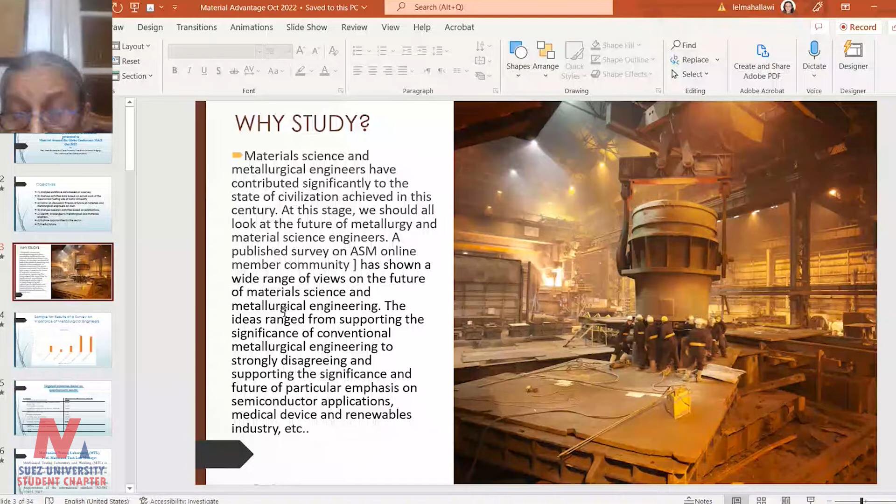The first thing I did was look back at the analysis we prepared during our preparation for the quality file, which is the accreditation file for the university. One of the things we had to do is look across where our graduates go.

Where do they work? I found that our graduates are distributed among major sectors represented by industry, which is steel, foundry, aluminium, metal forming, industry in general, then petroleum.

And in petroleum, of course, they do not work on rigs and drilling and producing petroleum, but they work on all the materials related to the extraction of oil, the transfer and everything, the pipelines, and this is where our engineers would be working.

Construction sites would include civil engineers as well as materials engineers working on the steel structures used there for validation, for testing, for assuring that the materials used comply with the standards.

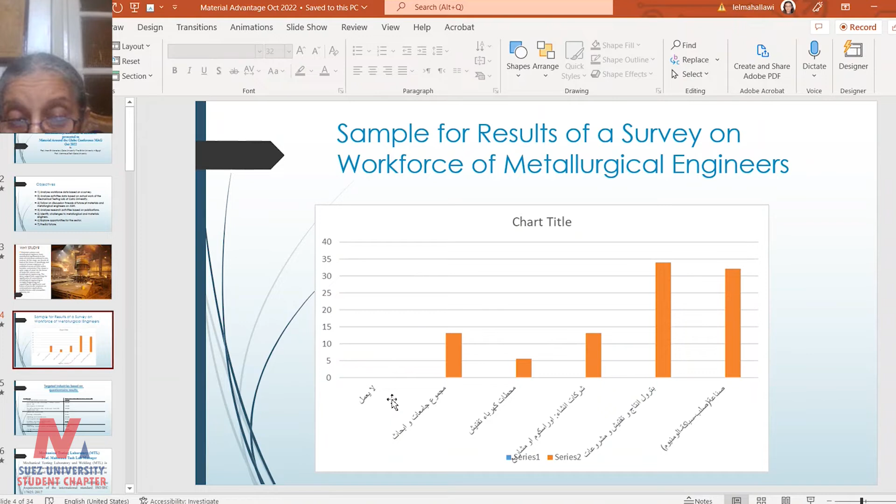Power stations, the same applies, where there is a lot of materials in power stations, and a significant number work in research and education. Actually, the sample I collected, which is more than 150 students, only one of them reported that he or she doesn't work, and it didn't even show because it was one of about 165 students, so it doesn't show on this bar chart.

Then I started to make a prediction of the number of materials engineers needed annually in those different sectors. Of course, we all suffer from the lack of numbers and statistics available on websites which should do this for predicting the future.

Before determining the number of students accepted for each engineering area, there should be a study and a national consideration of how many engineers we need, and accordingly the newcomers or students joining the first year should be accepted in view of these numbers.

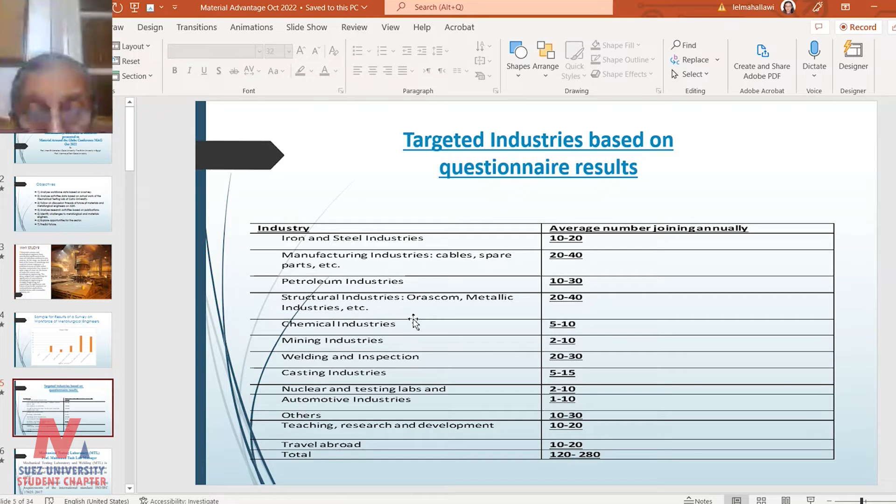It would be very helpful for deciding the number of students in the annual intake of any materials or metallurgical engineering department. The next thing I looked at was the work coming for testing, characterization, failure analysis, study and consultation cases, the work which comes to the mechanical testing laboratory at Cairo University, which is one of the greatest labs doing a lot of services for industry.

It's called Mechanical Testing Lab because originally, when it started, we were focusing on the mechanical properties of materials, but now the work has been extended to include other properties needed in industry, such as corrosion and others. So I looked at the number of customers visiting this lab and the amount of work needed.

By this lab actually is a great amount, which requires that the staff working there stay till 6 o'clock every day, 5 days a week.

And this is just a sample of the customers coming. All these customers are coming for the sake of material validation. We can see tractors, Orascom, engineering industries, melting companies, foundries, machinery parts and spare parts. The customers are from a very wide background.

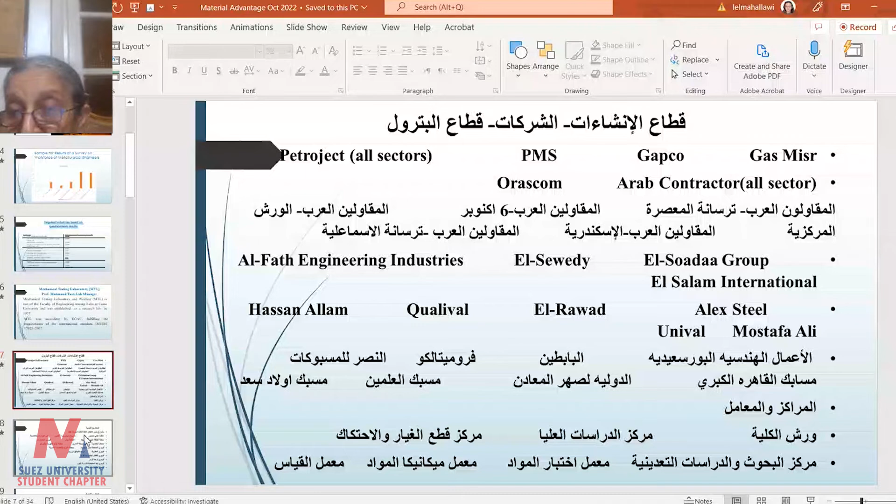You can see here, sorry, it's in Arabic, but this is how the data is reported, so it's just easy for me to take it as it is.

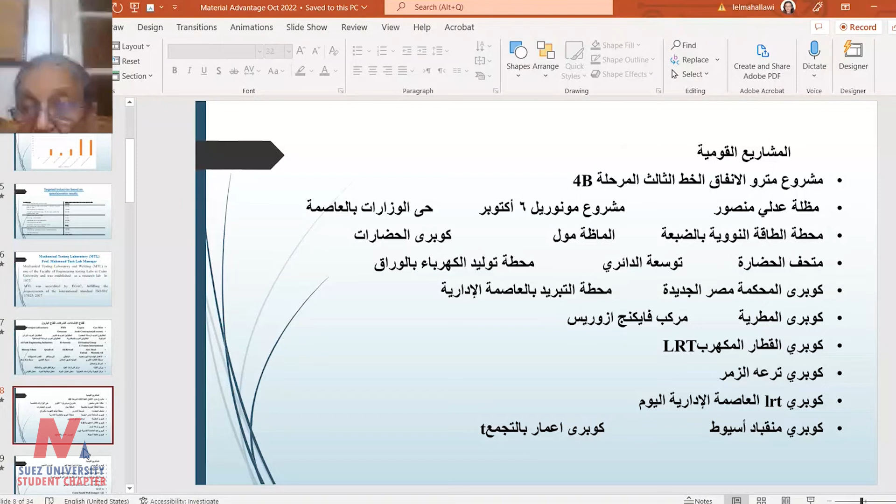Even the new electric train line, the new capital area construction, power stations - all these are customers, meaning all these sectors need materials engineers, because usually the engineers coming with the work or case to be studied are materials engineers. And here we have more projects like water projects, installation of pipes, petroleum, and construction and bridge building.

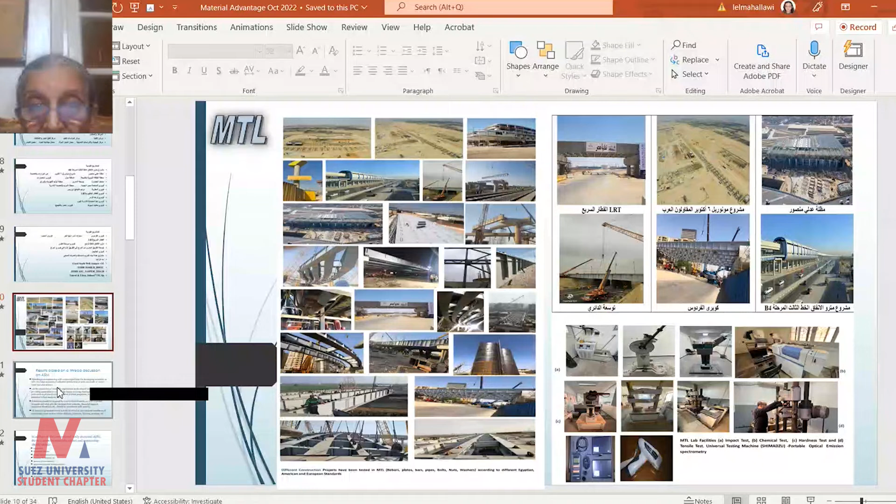And these are just images for all the construction sites that have been visited by members of our staff during the work. Then these two pieces of information, with the main conclusions that I have collected from the thread of discussion on the ASM site.

For example, I have concluded based on ideas and views presented by the contributors that metallurgical engineering will remain significant for developing countries, as still very large amounts of industrial production of parts are made of metals, such as steel and aluminium. Yet the expansion of materials engineering in developed countries leads to providing generalists, because many departments or programs there have changed to materials engineering and they do not focus.

Of course you cannot study everything in 3 or 4 years, so if you focus on materials engineering, you have to understand many things about materials, ceramics and polymers, and that's going to be at the expense of being specialized very much in metallurgy.

So the countries - and this is not on my mouth, but this is on the mouth of the contributors - the expansion of materials engineering in developed countries has led to providing generalists in most topics, and now they have a shortage in specialists in areas such as physical metallurgy end product properties, welding, casting, failure analysis, etc.

So I think that education should be inspired by local industrial needs as well as global demands, and what gets attention from industry - financial support, equipment donations, etc. - should be considered with priority.

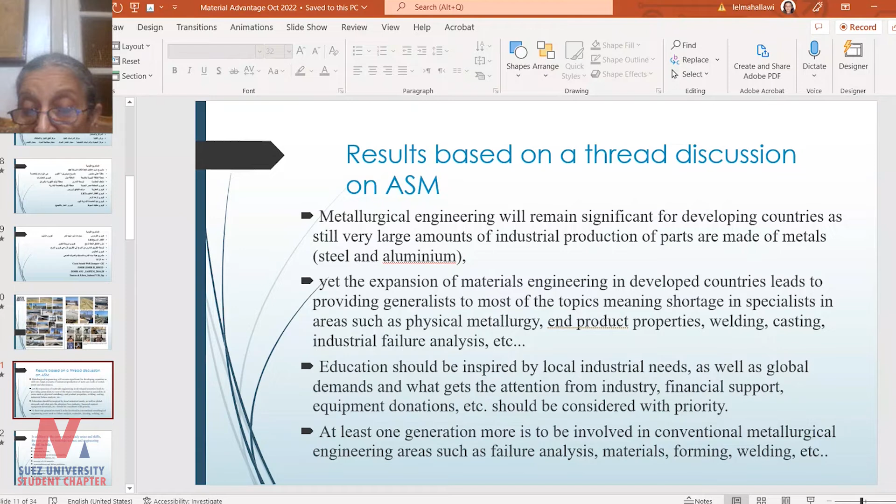And based on that - not only my opinion, but many contributors from India and other countries just like us - at least one generation more is to be involved in conventional materials, conventional metallurgical engineering areas such as failure analysis, materials forming, welding, etc.

In addition to the conventional study areas in metallurgy, we should not forget or ignore our graduates. The future engineers should be involved in other topics such as renewable energy, biomedical devices, energy harvesting and storage materials.

Materials for batteries, recovery of old materials, superconductors and failure prediction of superconductors, developing new materials that include quantum physics concepts, thinking about components for new computers and the AI that's going to be the future technology, developing new processes and materials, and the demands of high technology applications for hybrid and electric vehicles.

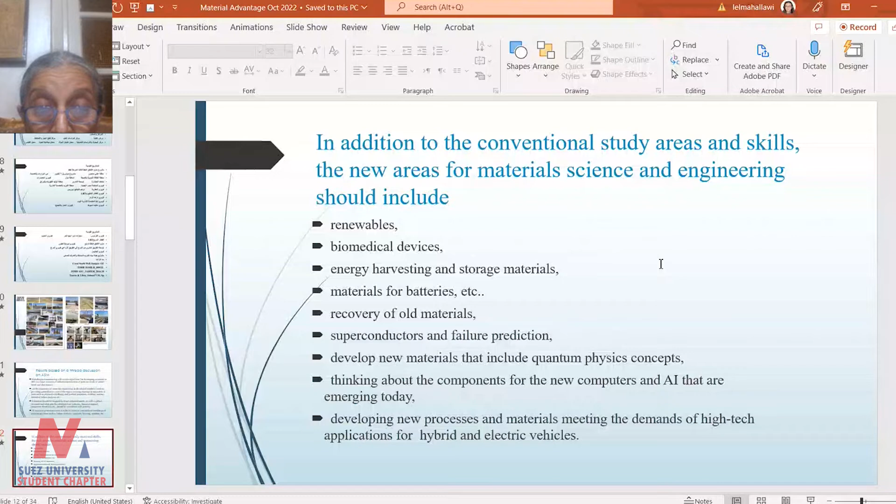These are just a number of topics that we see every day in the news, and our graduates should be prepared, because at least a percentage of them will surely find job opportunities in such areas. So these also should be included in the education for preparing new materials engineers.

Then I looked at Scopus, which reports the trends for research - what are the researchers doing? Dr. Karim Badr has politely referred to universities doing work for industry. Actually, this maybe will be 50% or less of the work at university, because researchers all over the world are equally focusing on

something new which is going to happen, which looks crazy for someone actually working on a certain area, but that's going to happen one day. And without people thinking about what's going to happen in 10 or 20 years, we would not have been at the position where we are now.

So based on these three sources for finding information, what should be done? We should operationalize higher education for innovation, industrialization, inclusion, and sustainable economic development in Africa. And now I have to go to Africa - it's not only Egypt, Egypt has to be a focal point in Africa. So I continue the remaining part of my presentation referring to Africa rather than Egypt.

And actually this would be referring to the region. But Africa needs Egypt more than the other part, because the other part of the MENA region, the Middle East, is developing, but Africa needs Egypt.

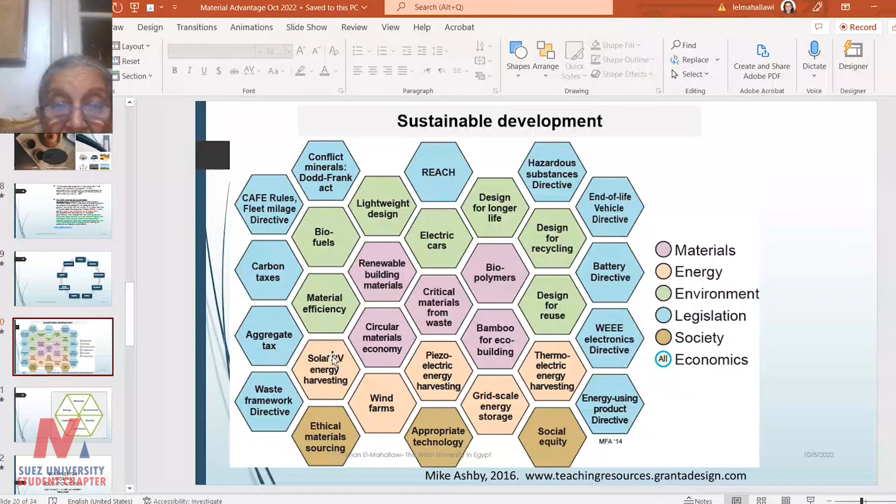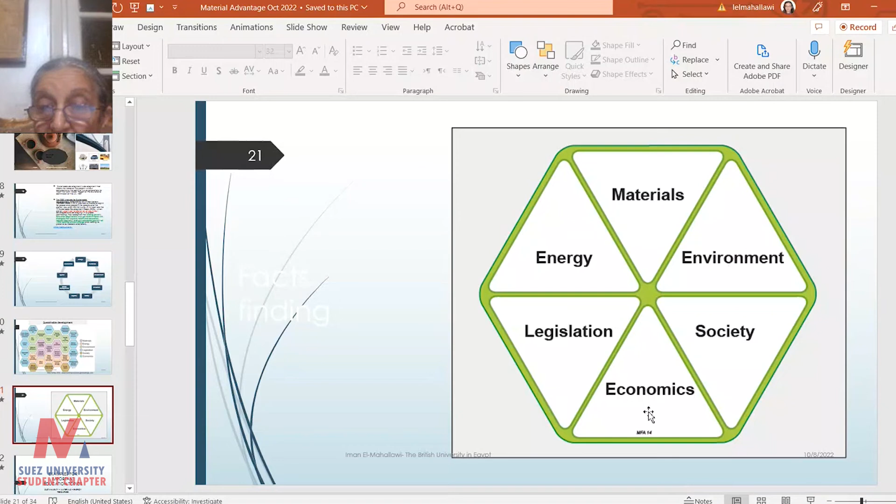And this is a range of ideas that may help you in your thinking. Again, we put it together - materials cannot stand on its own. It has to go in line with energy, environment, society, economics, and legislations. So I have come up at the end of this presentation with some examples for important education topics that may help my colleagues in integrating sustainability actions into their courses and whatever they teach.

The first thing I would like to refer to before going to the topics - let's not forget yesterday, back in the 60s. I remember these days, I was a kid, but I remember. It was metallurgy, number one. All the programs served or offered in the great universities all around the world were called metallurgical engineering. There were some emerging programs on polymers and ceramics.

During 50 years, metallurgical engineering expanded or integrated to be called material science and metallurgical engineering. And many, including the school where I learned metallurgy - I took my PhD at Leeds University, and it was called School of Metallurgy or Metallurgical Engineering Department - now it's called the Material Science and Energy Department. So what is the difference? Material science would include, in addition to topics about metals and metallurgy, mechanics, structures, design, and economics.

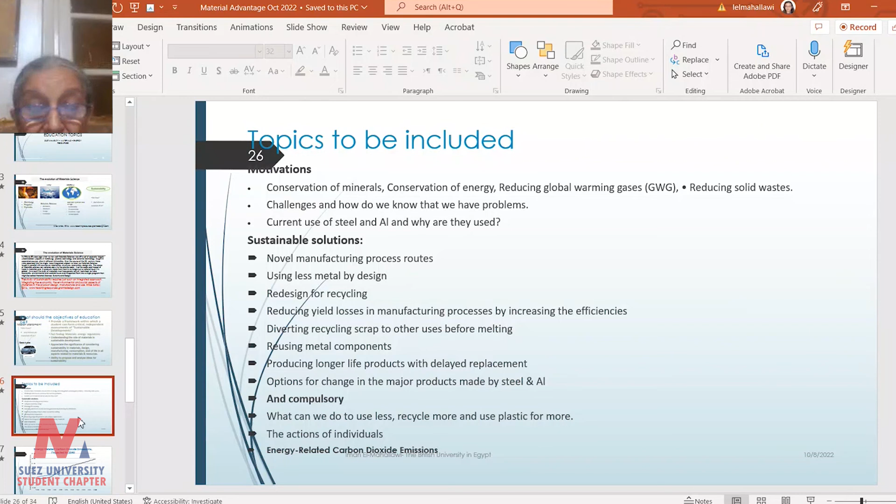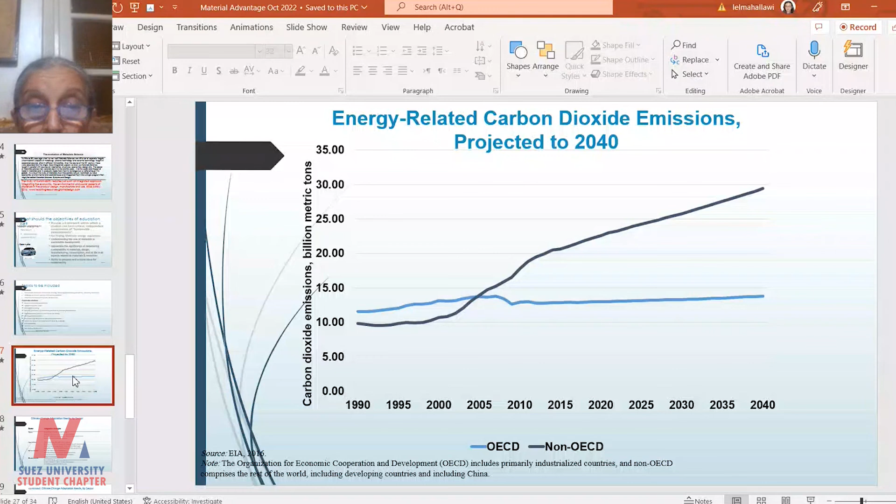Dr. Badr has referred to global warming and carbon dioxide emissions. Actually, this is true, it's not imagination. A lot of statistics are available on the website showing the increase in dioxide emissions and the increase in the temperature of the globe. What are the adaptation strategies? Actually, now the whole world—we are going to have COP27 in Egypt very soon, in less than a month.

World leaders are going to come and gather and collect ideas and talk about what legislations have they made in their countries in order to adapt to climatic change. We cannot reverse it, we cannot combat it, but we have to adapt to it. This adaptation would be covered in all major aspects of life: water, agriculture, infrastructure, human health.

There should be adaptation, and materials would come everywhere here. Everywhere you use material in conveying water to people, to cities, to rural areas. You use material for making the solar pumps, for making the pipes, for making the agricultural engineering equipment. You use material. Infrastructures, you have just seen that steel structures or new structures which are going to be proposed, even if not made of steels, are made of materials.

Human health, a lot of research is ongoing now. When you attend a material engineering conference, half the session would be focused on biomedical materials. Transport, of course, we need not talk about storage, energy storage and batteries. This is all materials' job.

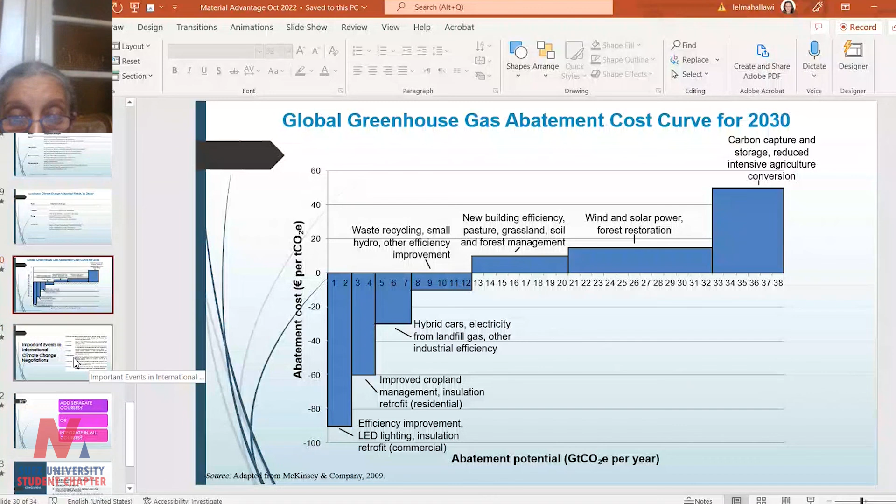And the main COPs that have happened were COP6 in 2001, COP15 in 2009, COP17 in Durban, COP21 in Paris, and actually we can add 2021, which was in Glasgow, because this is a mark where the ideas of meeting the global challenges have changed. Instead of combating and fighting, now it's adapting. We have to do adaptation. We have to use what we have and consider what's there for the future.

So the conclusions of this presentation show the role of climatic changes and sustainability: finding ways to recycle and or dispose of materials, revision of standard specifications. Actually, this is a very important topic. I expect that standard specifications that we use should be revised because many of them are based on materials made from raw material. Now materials are going to be made from recycled materials, and that's going to open the chances for some changes in these specifications.